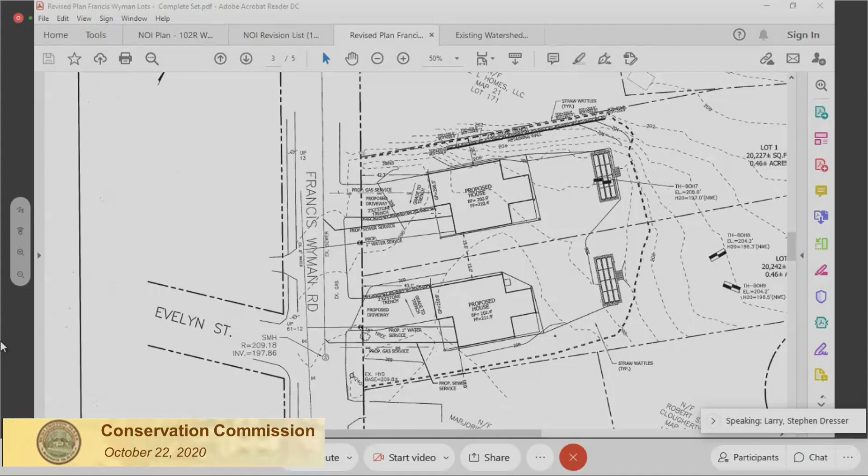All right, Eileen, please continue. Can I share it again? Oh, we'll stop as soon as I start sharing. I didn't understand how that worked. Okay, I'm sharing my screen. Where did my thing go? Steve, you put me off.

The original application was filed by 101 Francis Wyman Road LLC under the Burlington Wetlands Bylaw only, as the proposed work to create a 6-lot subdivision was within the buffer zone to an isolated wetland, and the 2 lots that are the subject of this amendment are outside the buffer zone. This is just going through the decision, referencing the various plans that were submitted, and the only new condition we are proposing is that the maintenance of the roof and driveway infiltration systems for these 2 lots shall be detailed in a revised stormwater operations and maintenance plan, to be submitted and approved before construction commences. This condition will be noted on the certificate of compliance as existing in perpetuity. In other words, all of the existing conditions still remain.

All right, Mr. Dresser, you okay with this? We are. Anything further from any of the commissioners?

If there's nothing further, could I have a motion to amend the existing Burlington Wetlands Bylaw permit for 101 Francis Wyman Road under Burlington Bylaw Article 14, on behalf of the Waypoint Companies? So moved, Ed. Second, Bill. Second, Don. Don, how do you vote? Yes. Gail? Yes. Bill? Yes. Jennifer? Yes. Ed? Yes. Chair votes yes. The amendment to the 101 Francis Wyman Road subdivision wetlands permit passes by 6-0.

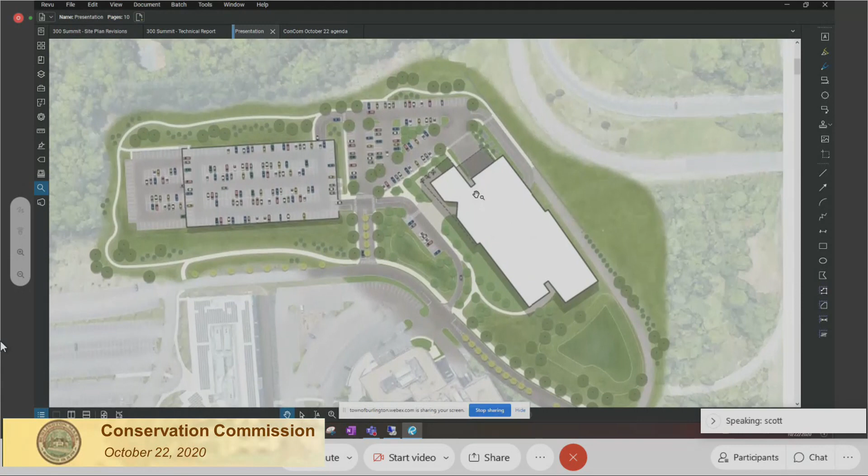As you indicated in the meeting announcement, the project consists of a 235,000 square foot life science lab building. This is an important component because, as many of you may recall, last year with some zoning changes and earlier this year in January, there were a number of zoning changes, including this property, to allow for life science development and to not only allow but help promote life science lab type development. That is what we've proposed here, and because of those zone changes, this project is allowed and can go forward per zoning.

So the plan here, what you see just on the top right of the plan is the ramp that goes to and from Route 3 that connects to 128. So we're just off that ramp area, working in the area just to the west, just to the south of the interchange and just to the west of the Millipore and 200 Summit buildings. The building is outlined in white, Will can show you where that is.

So that will be a 4-story building with some parking underneath it. There is a parking area just to the southwest of the building, that's a surface parking lot. And further south to that is a 1-level parking deck, so there's a level of parking on grade plus 1 supported level of parking above that.

For those of you that may recall, and we can switch to this later, there is an existing detention basin that serves the Millipore site that sits under the southerly corner of the proposed building and under the parking and entrance area that is there today. That detention basin will be eliminated and replaced with a new larger basin at the northeast corner. Just to give everybody orientation, north is to the right, so that is heading north off the right edge of the page.

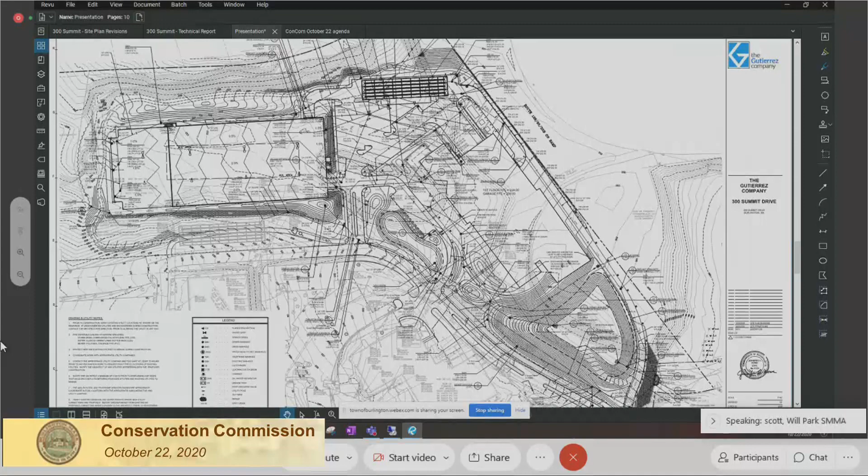So Scott mentioned the existing buildings at 400 and 600 Summit that I'm highlighting here, and 200 Summit here. There are... Actually, I'm not, Will, just to interrupt, sorry, I'm not seeing your highlighting at the moment. I don't know if other people are. Can you see my cursor? Not. No. Okay, I will use clouds then.

So there are several existing stormwater BMPs on site that will remain. Can everyone see that? Might need to darken that up. All right, last attempt. Can everyone see that oval? Yes, the red oval. So that is an existing recharge system that was installed as part of the 400, 600 project.

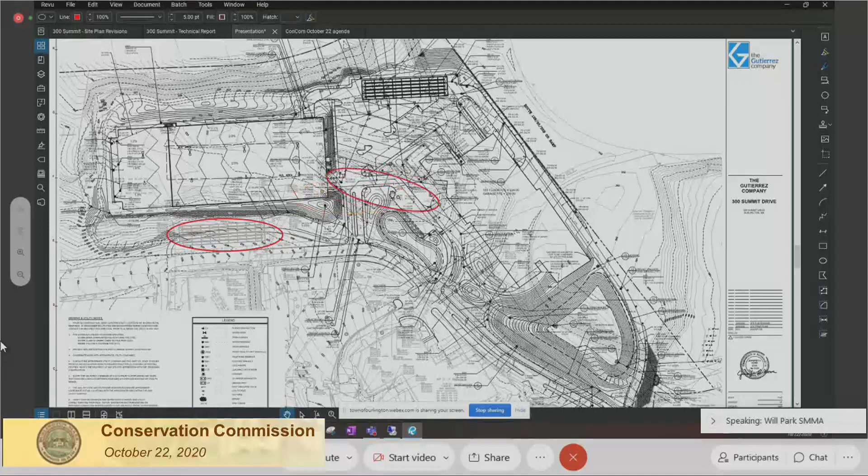Additionally, Scott mentioned the existing detention basin is roughly in this area here. I'll zoom in on it so you can see the contours. So it's kind of in the area between the two buildings, pretty much, the structured parking and the proposed 300 Summit building.

So what we've done, as Scott mentioned, is first order of business will be to relocate this existing basin over to the page right where the proposed basin is located. The dimensions of the basins are pretty similar, and that's generally a result of we have a lot of different systems here on site. We have the existing recharge system, and then the proposed recharge system at the top of the page here, and we also have the rooftop runoff from 300 Summit.

Because all of these systems collect and detain stormwater runoff at different times, the peak runoff rates nicely do not coincide when they're all routed to the proposed detention basin system. So the proposed basin is roughly the same size as the existing basin. As Scott mentioned, the proposed basin will pick up the discharge from this existing recharge system to remain.

Scott mentioned there's a bioretention system right in front of the building here. Can everyone see this area here is a bioretention area with a pea stone or riprap pretreatment. So this will all sheet flow off the parking area. There's no curbs and gutters here, just sheet flow off this visitor parking area into the bioretention.

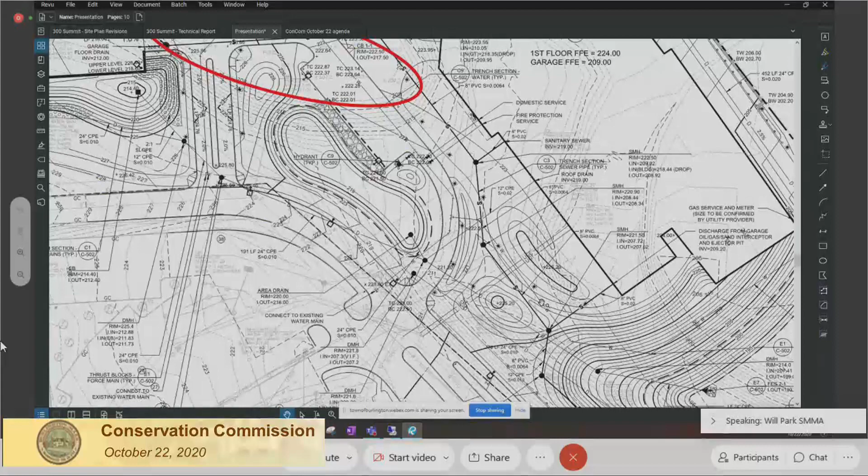And then there's a large collector pipe that collects the discharge from the existing recharge system, the bioretention, and the rooftop runoff. There's a roof drain that comes off the building in this area here, and they all discharge into the main stormwater basin.

The surface area, the surface parking lot here on the top of the page, and... Can I interrupt for a second please? This is Bill.

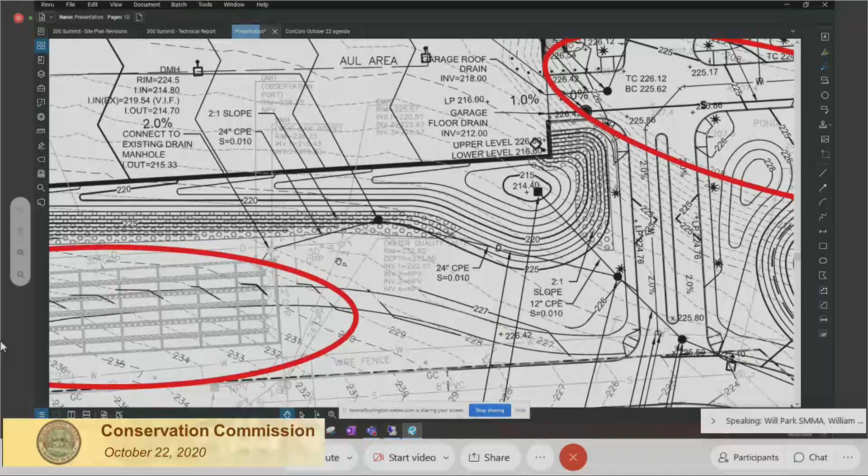Can you show how the existing water feature infiltration basin connects to the new basin? Sure, show me the line on the map. There's an outlet control structure just outside of the existing system, and then it used to head across country to the existing detention basin. We're intercepting that pipe, and then there's this main header pipe that heads across the whole front of the site that picks up those various things that I mentioned. Very good, thank you. You're welcome.

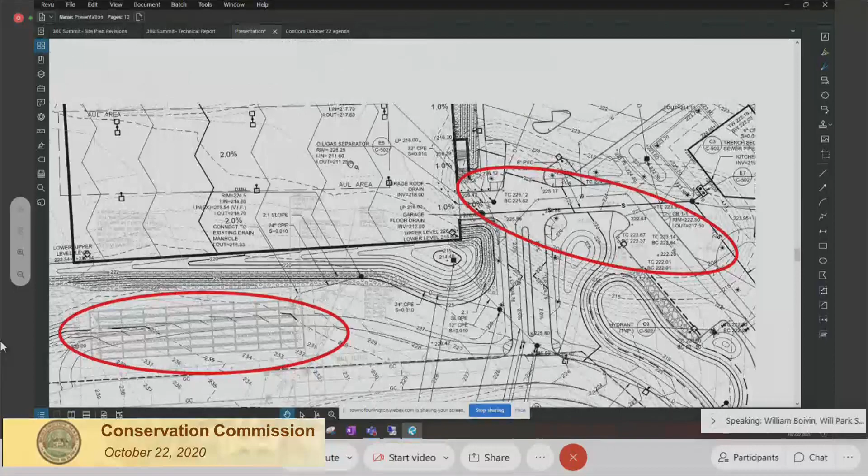Feel free, anyone, to stop me if you want me to go into more detail. So as I was saying, the surface parking lot here behind the building, kind of to the southwest of the proposed 300 Summit building, and the structured parking get routed to a water quality unit located right here that discharges into the proposed subsurface recharge system. That system is identical to the one that was installed at 400 and 600 Summit.

It's currently proposed as a Contech perforated 48-inch, I believe, CMP system with crushed stone around it, or approved equal. We think that's a good system for this. It's easy to install, and it's been working well in the existing configuration.

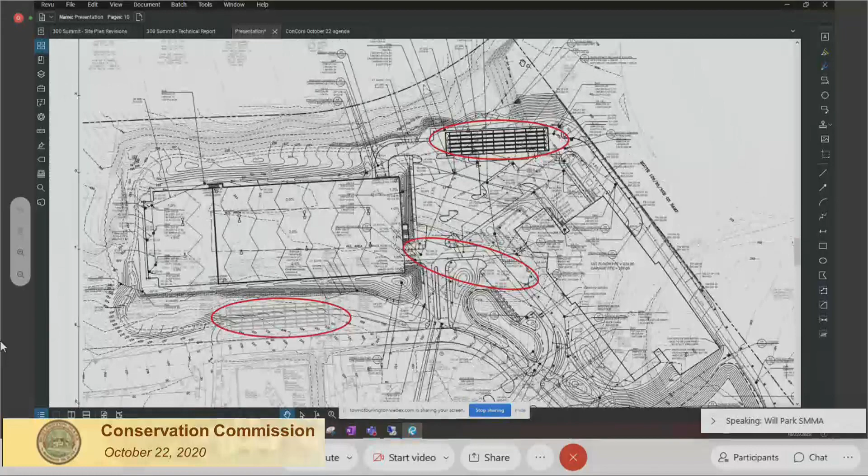Despite its adjacency to design point 3 in this page's top corner here, the discharge from the proposed recharge system actually runs in a pipe, discharges here to an outlet control structure, and then runs in a pipe all the way along the north side of the building. Sorry, I'll try to limit the zooming and panning.

And that pipe that discharges out of the proposed recharge system actually bypasses the surface detention basin and discharges at the same location, at the toe of the slope here, at design point 1.

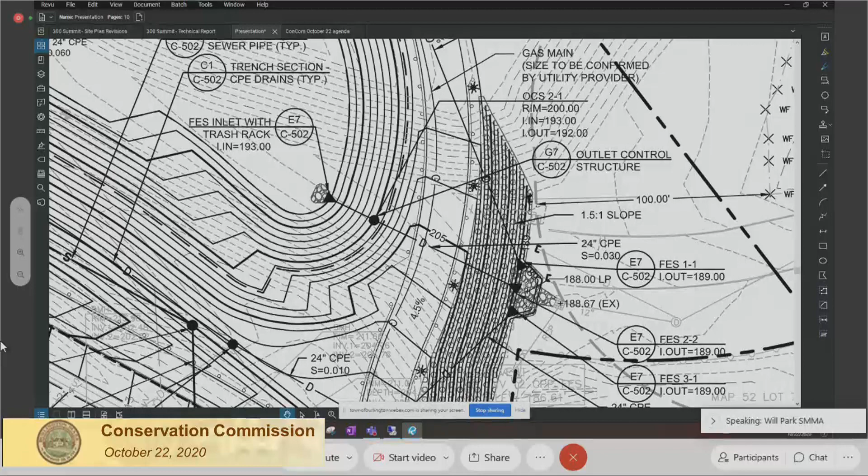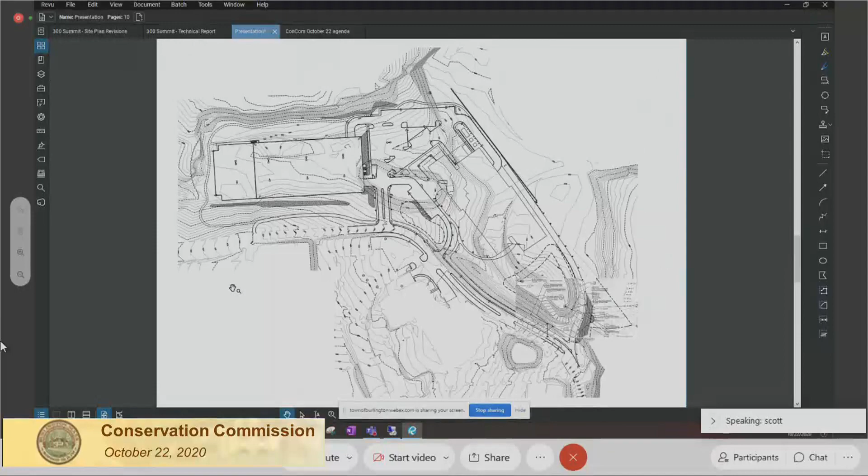And Will, just to throw in there, I'm sure everyone in the commission is probably well aware of this: the subsurface recharge systems obviously serve two purposes - one, the groundwater recharge, but also some holding volume in there. And what you really have for your outlet control is really overflow pipes for what can't be handled within those systems.

Correct. They handle a good amount of flow, with a fraction of the inflow coming out of the outfall. As a result, for example, the rooftop runoff does flow freely into the proposed system, whereas there's a slow discharge from the recharge systems. So those peaks don't really coincide and add on top of each other - they're kind of offset, so the post-development peak numbers don't spike, which is nice.

So that's the general overview of where things are routed. Any questions on that? All right.

What I'd like to suggest is that as we ask questions, let's distinguish between those that should probably have some kind of response in writing, as opposed to those that have a very quick answer. Things that require a more elaborate explanation - we can take note of the issue and respond more completely after you've had time to think about it. Does that sound like a good approach?

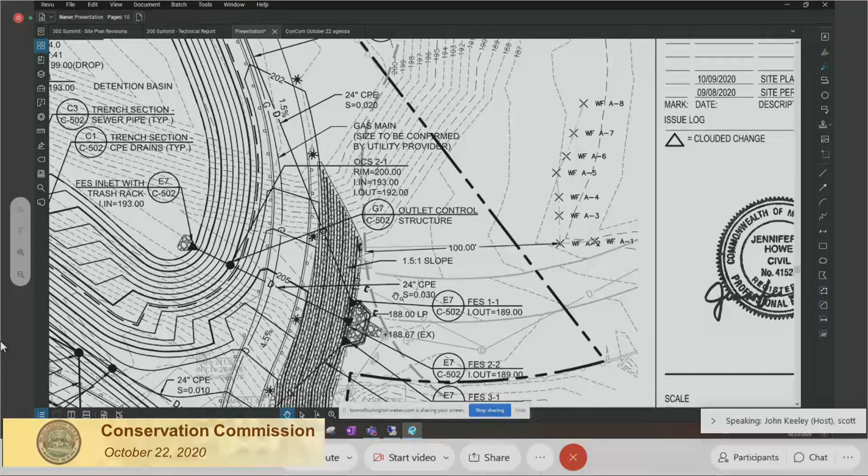Well, just to throw out there, a lot of the soils up on site are till-type soils that actually don't infiltrate greatly - is that correct, Will? I mean, there is some infiltration certainly in your recharge systems. Yeah, I'd agree with that, Scott. It's mainly till that has been compacted, so I'd be surprised if there was much infiltration.

Honestly, with the surface area as big as these, I'd say evaporation is probably more likely to lower water elevations. Have you observed it infiltrating, John? No, it doesn't look like a lot of water is in there at any time. It doesn't seem like water stays in there for an extended time.

So I believe it's equipped with a low flow orifice, a 6 to 12-inch orifice right at the bottom elevation. So it's intended to be a dry basin. As well the proposed basin.

I have questions about your TSS worksheets. I can do that offline. I don't think you're taking credit - you're giving yourself 0 for your proprietary treatment structure, stuff like that. We can talk about that offline, though.

Thank you. John, could we go back to see if anyone has questions regarding the new basin? Because you brought it up. Does anyone on the commission have questions about the soils or the basin or how it's intended to work?

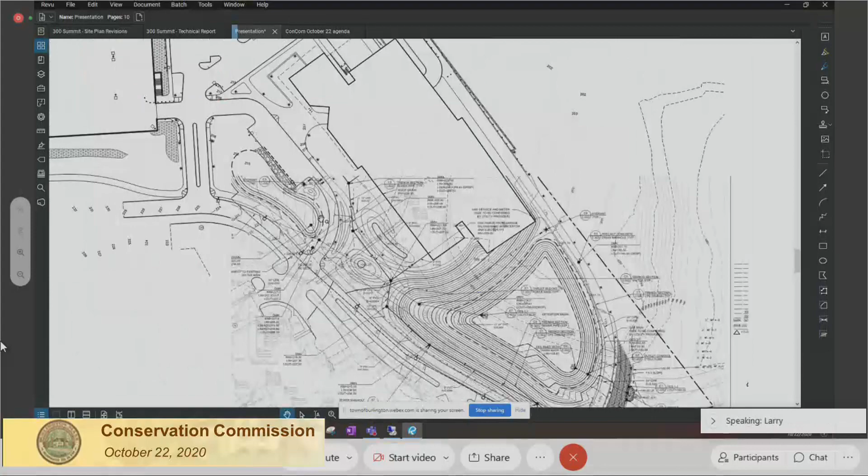Yeah, I understand that observation. These are very long basins, so when we consider Stokes' law of sediment settling out in water, it's still in a basin this size. When it's filled with water, it still has plenty of time to reach from the inlet to the outlet, versus a small hole in the ground pond in a smaller development that would make a significant difference.

The travel time is significant. I agree it does appear to be a little bit shorter, and we could take a look at segmenting this or creating a longer travel distance for the smaller water quality storm events.

Well, could you - there's no reason to engineer it right here, but could you note it as an issue to take a look at whether it needs to be segmented, or to have a forebay in order to achieve the maximum solids removal that you're looking for? Absolutely. All right, so let's leave that as an issue.

All right, anyone else have a question on the new detention basin? Okay, John, would you like to continue? I kind of interrupted you because I wanted to finish any discussion on that basin. No, that's really all I had.

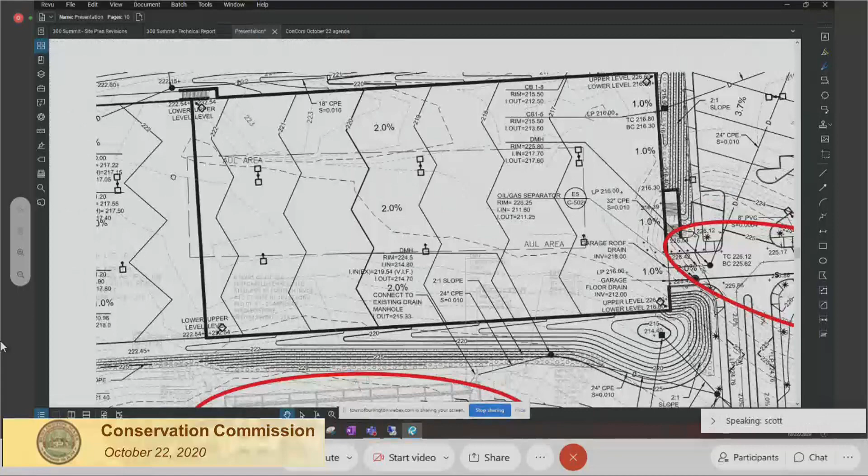The other questions I had were somewhat, I guess semantics, I don't know. Inside of that parking garage, there's a term that says AUL area, what does that mean? So as part of the original development of this land and the former DOT land, there was some contaminated soil material that was consolidated and buried in this area, and that area is marked and recorded, and the intent is to really not disturb that. And this pavement for the parking will create a more permanent cover over that area.

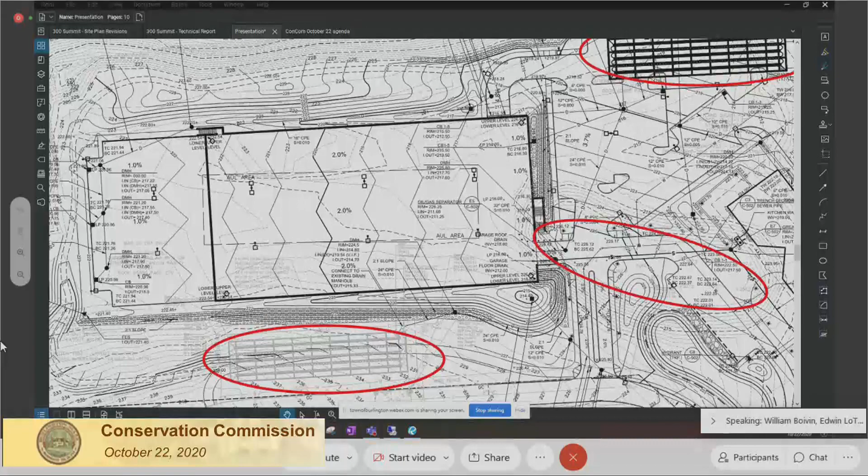Okay, and the last question I had for terminology was also in the underground garage, the one under the building. There's a term in there that says there is an ejector pit, can you explain that please? Sure, so in the technical report we submitted a conceptual layout of the under-building parking and indicate that everything will generally flow in this direction here, down to this corner.

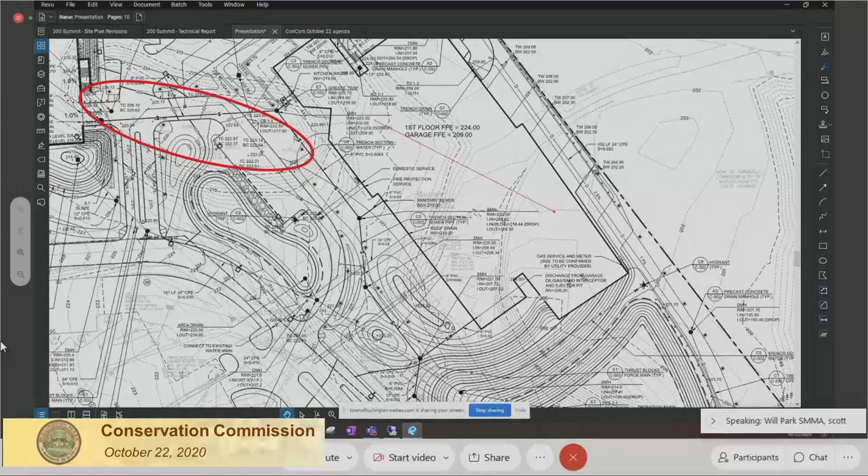And then as part of the building plumbing design, there will be an oil, gas, sand interceptor, and then a pump station under the slab that will discharge to right here. And as you know, because it's coming from a covered garage area, it needs to be treated as sewer, not as stormwater. So that's a future design by the building plumbing engineer, which is pretty typical for under-building parking. Okay, so that's just going to need to pump it up to the sewer level. Correct. It'll pump it down in this area, pretty much where that call out is, and discharge up closer to grade, and then it'll be gravity from the edge of the building out. Okay.

Questions? I think that is all that I have regarding drainage and infiltration and stuff. Thank you. Thank you.

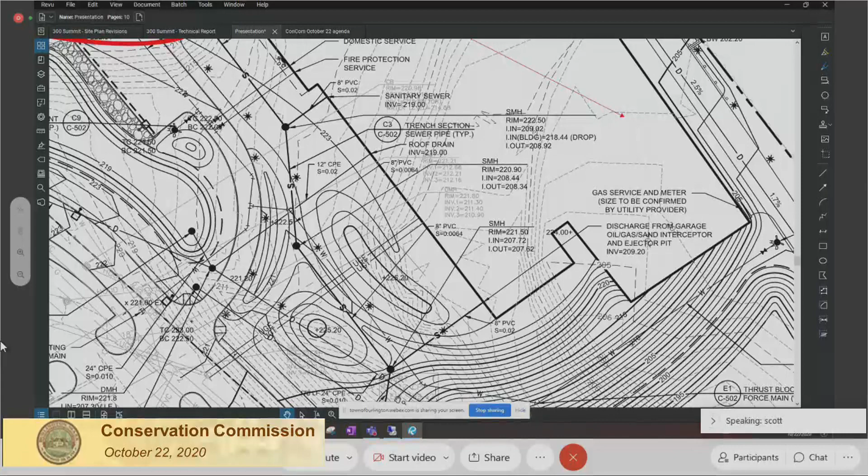Larry, you're muted.

All right, I'm back. Jennifer, anything on infiltration or anything of that nature? No, not at this time. Thank you. Ed, how about yourself?

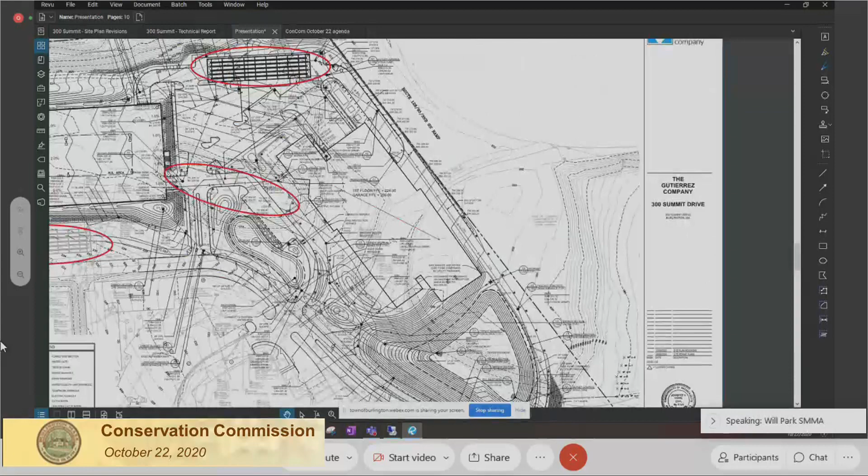The only thing I was looking at, I guess I just don't understand it. The pipe that's coming down from that drain pipe on the right side of the new basin, where does that enter into the basin? That one that leaves the proposed system runs along this entire emergency access drive, and it actually bypasses the proposed system. So it doesn't go into the basin itself, the drain.

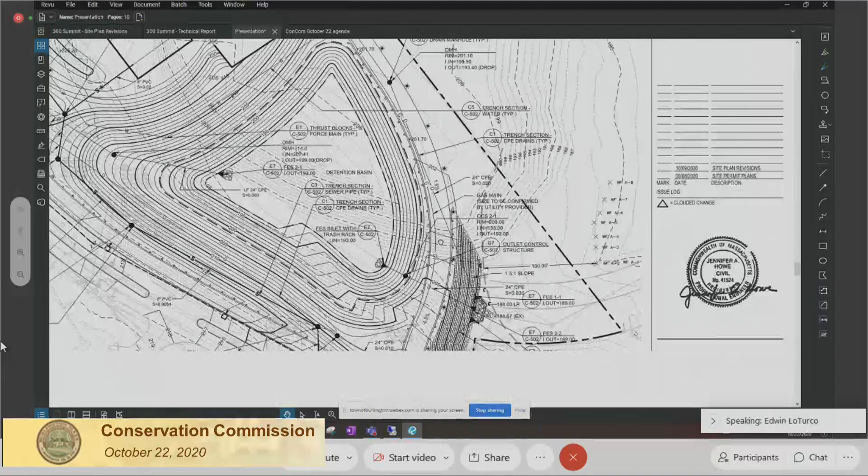Correct. I'm good. So it discharges at the toe of slope here in this energy dissipator. Yeah, that's where I was thinking too. Just wanted to confirm that for me. Thank you. Go ahead, Larry.

Thank you. I had two questions that came to mind, folks. One is for the new basin and the bioretention area, are these being constructed on previously filled areas? I assume you have some test borings to characterize it. Is it homogeneous across the whole thing, or did you have more than one test boring? It's a fairly large basin.

So there's a lot of area and variation in the soils here, and a lot of it was fill from prior construction, either prior to our arrival or some of the soils from our work when we built Millipore. So the soils across the site are all varied and very different, and are going to require some level of recompaction, movement, excavation, all sorts of things.

Well, the question I was actually trying to express is, given the heterogeneity of the soils underneath, for the areas where you're relying on some infiltration, do you have a sufficient number of borings in these locations? I didn't see any material. I couldn't really say, in the new basin for example, how many borings they took. I don't know offhand, Will, if you know where the borings and test pits were. I mean, the whole area was poked quite a bit at various points in time.

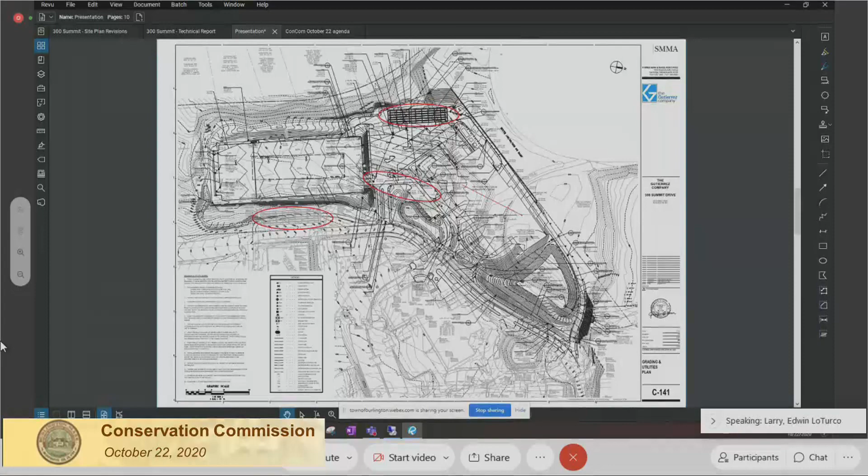The second thing is, are you doing anything to prevent erosion? You have some pretty steep slopes here. The obvious one I'm looking at now is the new basin, but there are other areas of the site where there are some substantial slopes. Are you doing anything like terracing, or even on an intermediate basis, to slow the water down? Or are you proposing an intermediate row of hay bales, or something for level spreading to slow the water down, to prevent erosion through these slopes once they're disturbed?

Good question. Why don't I answer in the post-construction final configuration, on the layout and materials plan? You'll see here wherever there's this hatch, the honeycomb if you will, we call for an 8-inch thick section of 4 to 5 inch diameter riprap stone over a non-woven filter fabric, where slopes exceed 3 on 1. So 2.5 on 1, 2 on 1, we have a small area that's 1.5 on 1. We're already planning on this, and this will be fine-tuned in more detail with the geotechnical engineer who's on board.

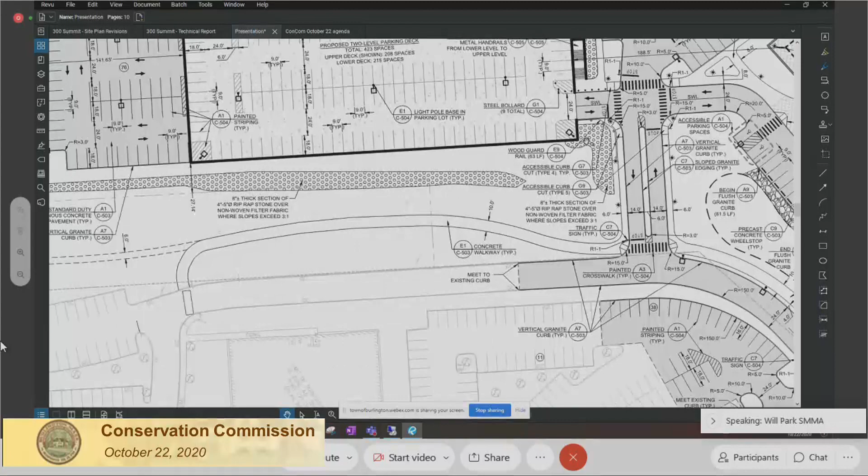So you can see there's a pocket here, near that small depression we spoke about a minute ago. And then on the outer slope of the detention basin berm, there's a larger section here too. As for during construction, that's something we'll be monitoring very closely, using best management practices from our NPDES SWPPP permit. There'll be an on-site geotech who might have to, for example, install this riprap sooner rather than later, because that permanent stabilization is probably the best thing to do to stabilize those slopes rather than a temporary measure.

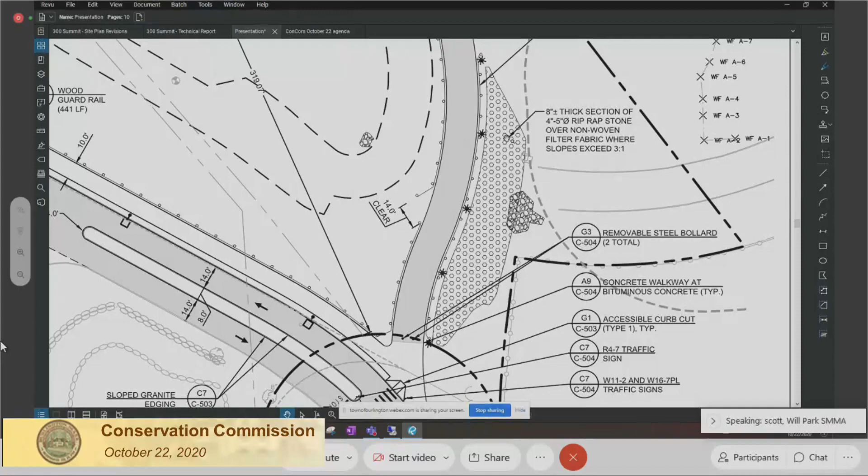For example, I will throw in there, Larry, if we go to the erosion control plan, that area, especially given the existence of offsite wetlands that we don't want to mess with, I think maybe we could propose a double row of hay bales in there.

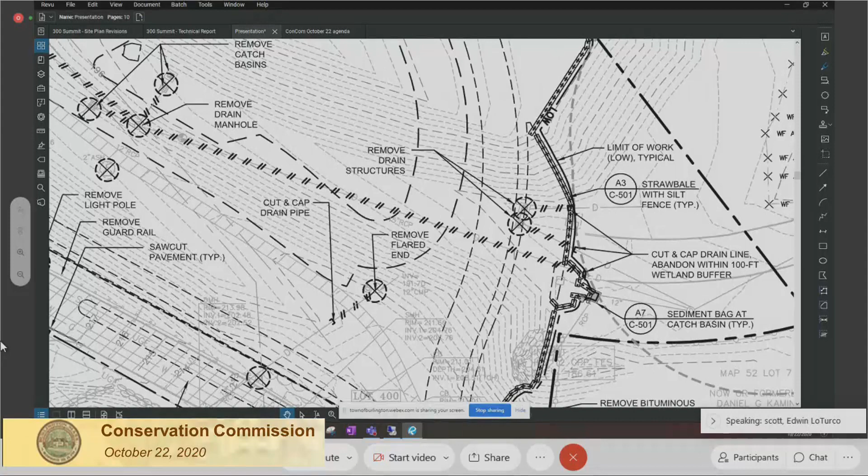I'm not sure we have that already, but maybe we can beef up the erosion control in that area so that we're sure, because that's where all the flow heads to today, for the most part, and that'll be the area that we'll want to pay the most attention to.

Okay, Scott, I'd like to leave that issue with you as something to think about - the areas where there are impacts, particularly during construction, once it's disturbed, and particularly if you do this project in the spring, there'll be a lot of rain and so forth.

In general, we showed straw wattles where we don't anticipate there's going to be a lot of runoff, and in areas that are susceptible to runoff, we increased it to straw bale with silt fence. All right, well, we'll take a closer look at it.

All right, that's all I had. I thought - is there anyone in the audience for this? This is the erosion and sedimentation control permit for 300 Summit Drive. Is there anyone in the audience that would like to make a comment?

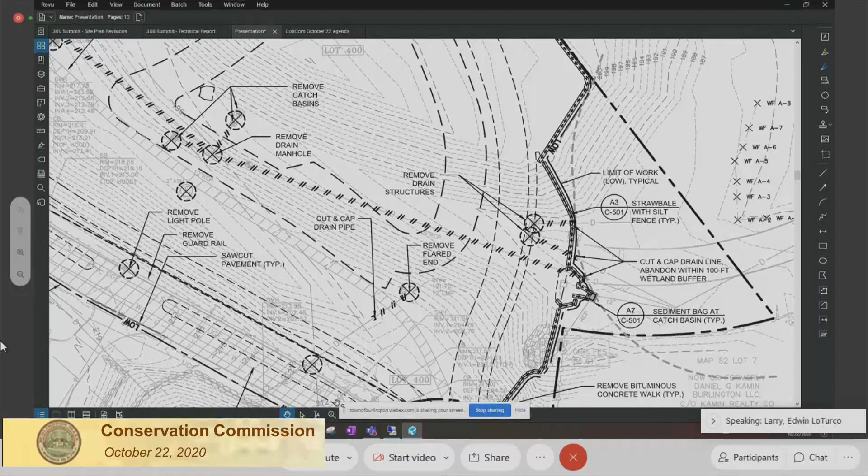Okay, if there is no objection from the commissioners or John or Eileen, what I'd like to do is just go down the list of a few things that I had and see if it either needs to be clarified or added to. Does that sound good? Good.

All sounds right, good. The first item is you agreed to take a look at the detention basin, the new detention basin, and whether the time of travel for settling out needs either some segmentation or a forebay or something of that nature. You'll just take a look at it. Is that agreed? Okay, that's number one.

Number two, John suggested - I think you were suggesting, John - you'd like some details on a sequencing plan? Yes. Okay.

Number three, Gail asked for PDFs that are a little bit easier to read so that she could blow it up and be able to zoom in on the details a little easier. So we have those, I can just email those directly tomorrow morning. Okay, so we don't need that. Okay, so that's 1, 2.

Okay, the third one is Bill mentioned that parts of the drainage do not seem to have treatment, and you're going to look at installing water quality units in one or more manholes, and you'll respond to that item? Yeah, I think we identified one area.

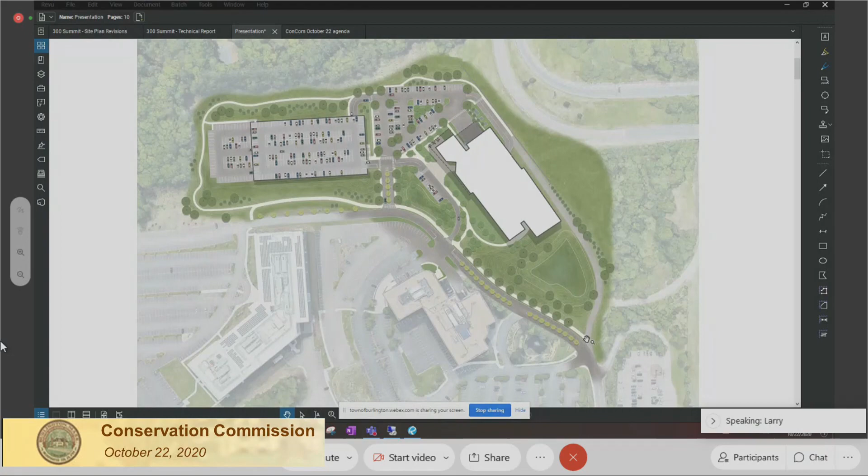Could I have a motion to continue this hearing for the erosion and sedimentation control permit for 300 Summit Drive to November 12th? So moved, Bill. Second, Don. Don, how do you vote? Yes. Gail? Yes. Bill? Yes. Jennifer? Yes. Ed? Yes. Chair votes yes, it will be continued till November 12th by a vote of 6-0.